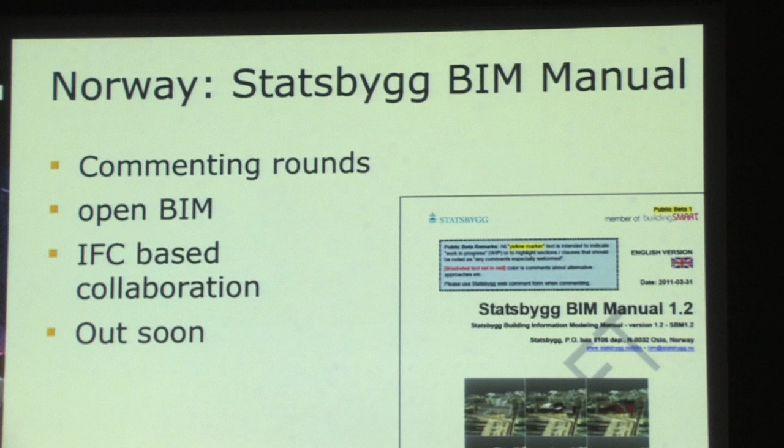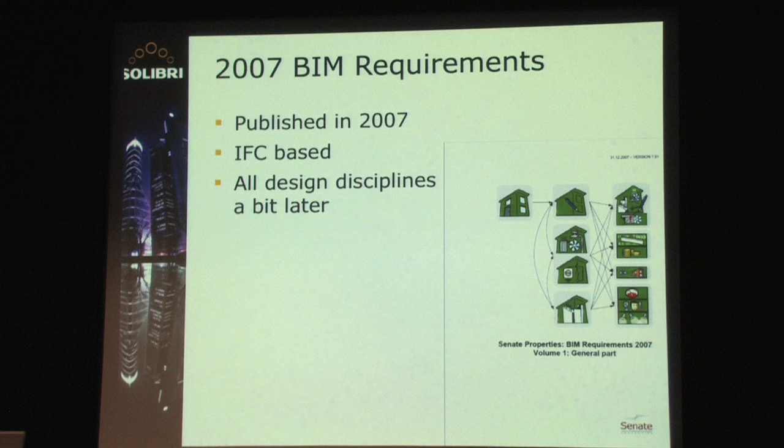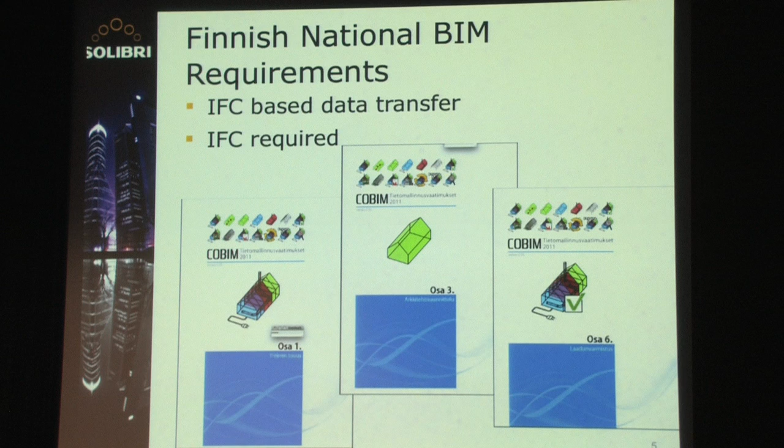If we start with the current situation in Nordic countries, Statsbygg in Norway will have their BIM manual out quite soon, and what they speak about is OpenBIM, but they really mean IFC. In Finland, we have had BIM requirements published by Senaatti Properties, which is the government-level facility manager. I think what is most interesting in Finland is that Senaatti Properties had the idea that they would upgrade their BIM requirements and guidelines. In practice, this means that in Finland we will have, as the first country on earth, national BIM requirements.

So from the architect's point of view, there will be something that is most beneficial. There will be what we call a buyer's guide. Building owners and construction companies, they will have instruction on how to buy BIM services.

In other geographical areas, UK is sort of getting started. Her Majesty's government are preparing a BIM strategy. In the US, the federal level GSA, they have had BIM guidelines for about 10 years. In Korea, we have lots of guidelines and requirements. And it's really good to see that Sweden is sort of coming a bit behind. We heard about Locum, Skanska is very deep into BIM, and I know that Peab and many engineering and architecture companies are also.

So I think this is a good development, and I was especially happy to see Link tell about how they feel about BIM and how they sort of approach this problem. It's not about software, it's about the process, it's about the competencies. And in this way, I think the approach was very mature for an architect office.

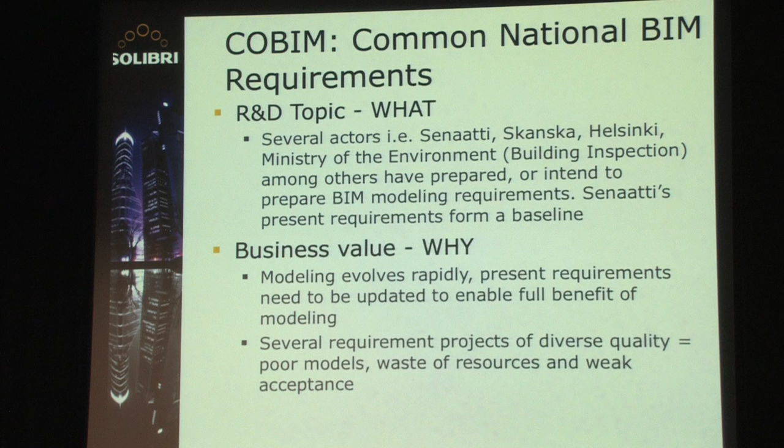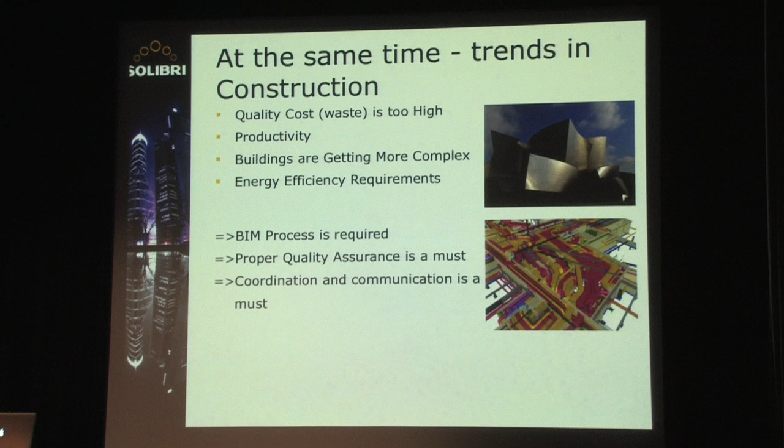So the COBIM is basically a continuation to what Senaatti Properties has done. And the real business value is that when we have one set of guidelines and requirements, everyone in Finland will know what to do. Link showed that the BIM process is required, and they also said, I think Lars said something, that you have to get things really right. Yeah, and that's about the quality. And of course, the coordination and communication is most important.

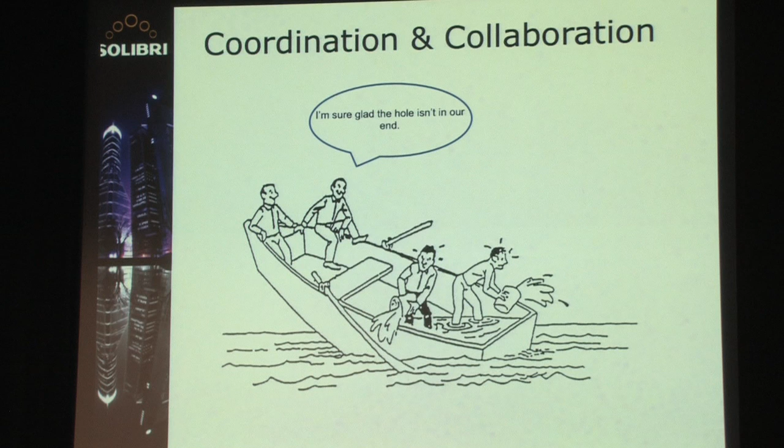So the old way, it doesn't work. We have to get rid of this. And this is, of course, one of the things we try to avoid when we use BIM and quality control.

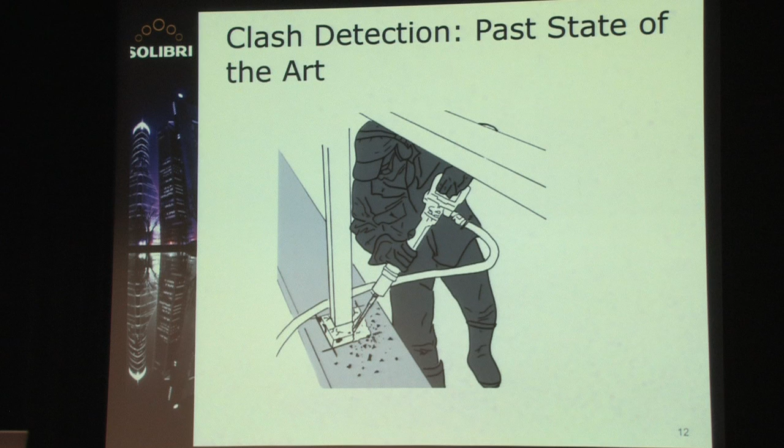Of course, there are much more other benefits than we can see in this picture. We have better design, we have better facilities for the end users, we have something that will probably be more friendly from the environmental point of view. So basically, BIM will be able to help in most of these things.

The traditional way in complex things has been that we make a prototype. And if we sort of think about manufacturing industry, they would make prototype after prototype, and then they would get the production process right. And this is something we haven't been able to do in the construction industry. So things are getting better.

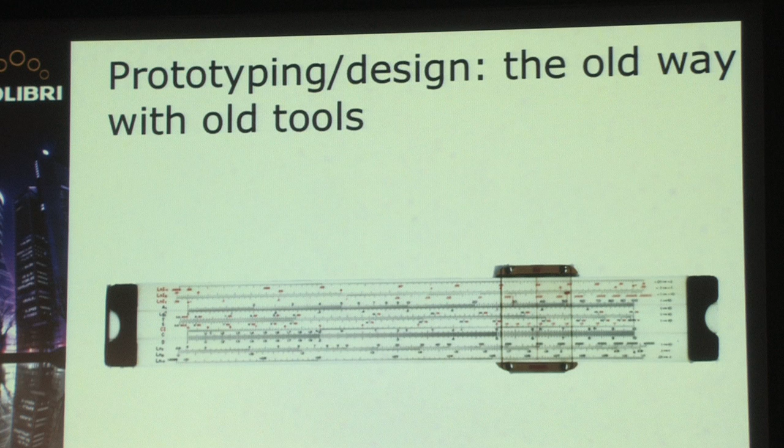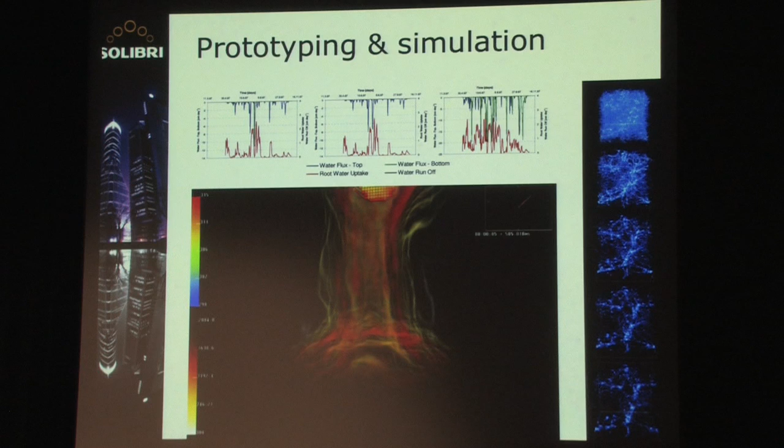This is what we used to have in the 1970s, even 80s, when we did, for example, structural design. But today, with the use of computers, we can basically sort of get at real-life prototypes. But this will have tremendous effects on the quality of design and, for example, construction costs, environmental issues, and so on.

One word about Solibri Model Checker. I always want to lift up one thing, and that's today, it's the rule sets in Solibri Model Checker.

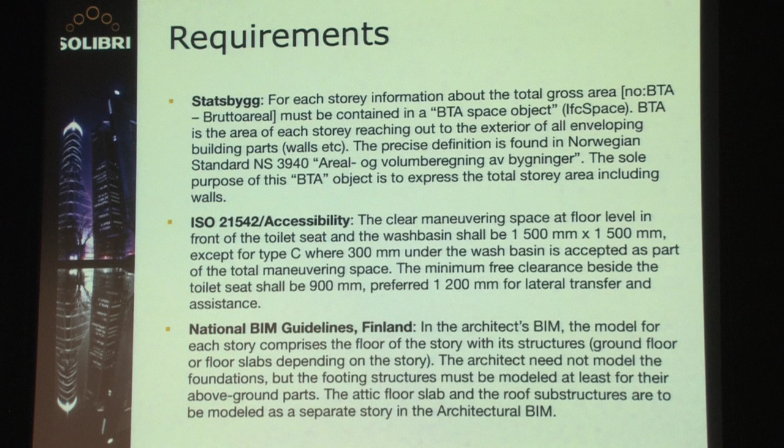Someone will have requirements. Locum will have a BIM manual, Statsbygg will have a BIM manual, we will have accessibility requirements. They are quite complicated. Okay, but then at the bottom, if we go to the bottom of things, BIM requirements are usually very simple and easily understood.

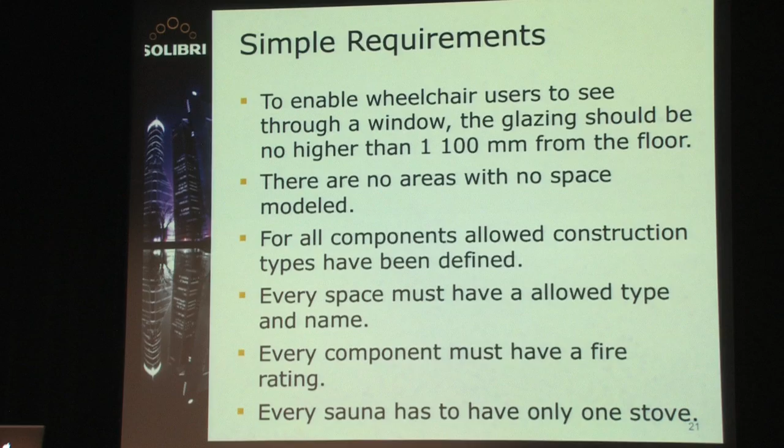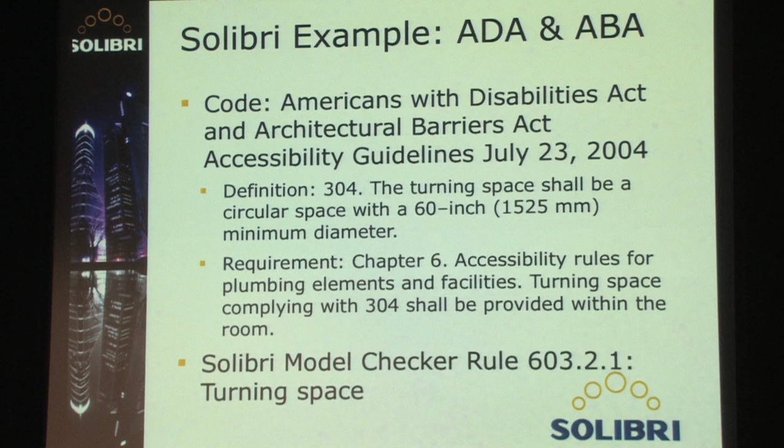And this is where actually Solibri Model Checker comes in. It's about analyzing BIM files. For example, in the United States, there is a building code, Americans with Disabilities Act, and they have this definition that in an accessible space, you should have a 60-inch turning space. And in Solibri Model Checker, we have this rule, 603.2.1, called turning space. So someone has a requirement, and Solibri has a rule.

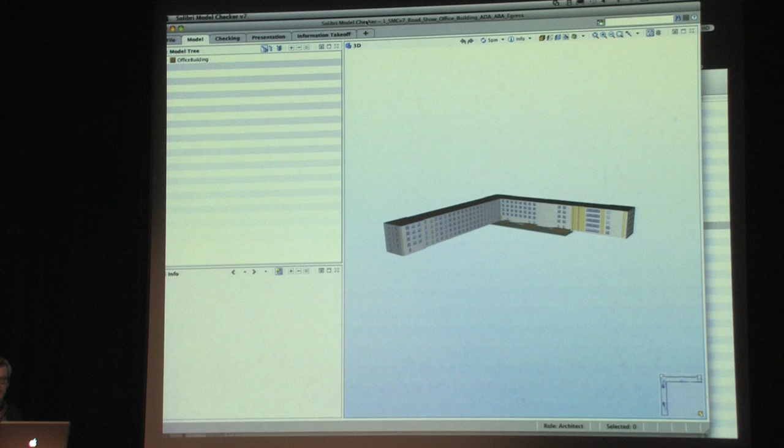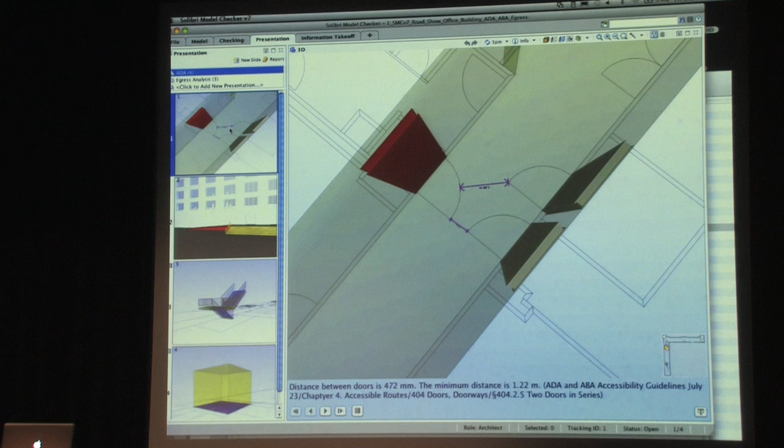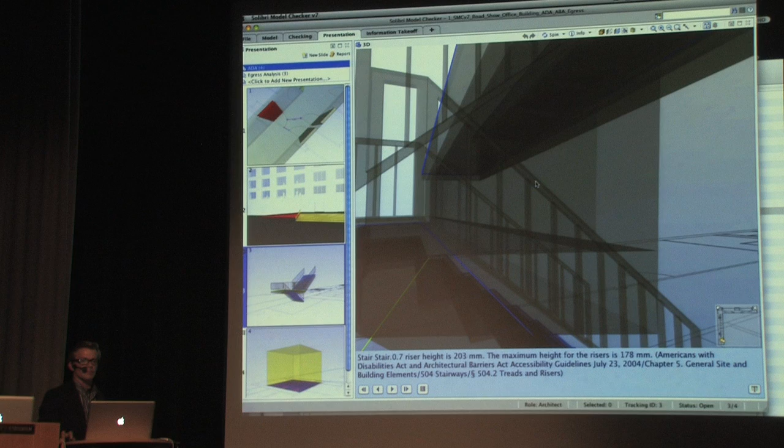So in practice, what this means. Okay, this is a building. It's very boring, probably a federal building by the federal government from the United States. And here we have done some analysis of the model. For example, accessibility. Solibri Model Checker has detected that if we have the doors open, this corridor does not fulfill the requirements. Or this ramp outside the building, it's too steep and it's too long. And the risers in this stair, they are too high.

And in practice, what Solibri does, the checking. We have one rule, and we run the check. Okay, now you can see the progress bars, and very soon it's done. And the results are visible here.

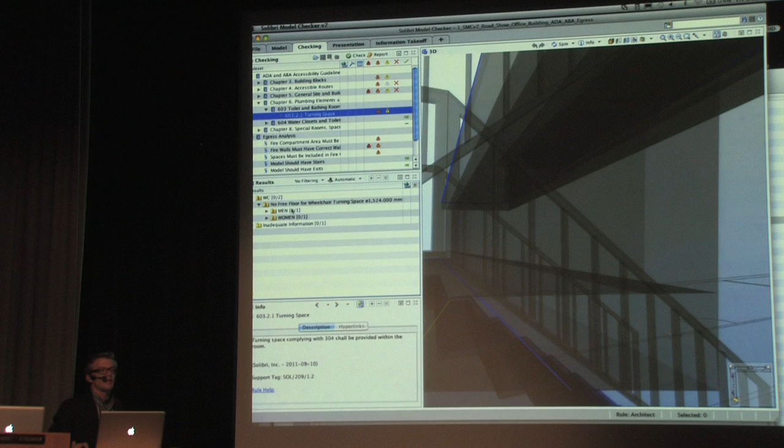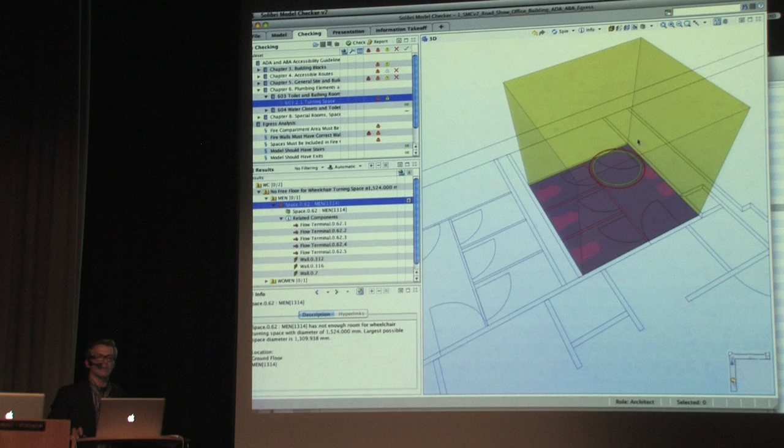And Solibri Model Checker has detected that we have this space. Okay, and let's hide the space component, and let's take the space and the related components together. So basically, we have space, we have what we have here, we have turning space. Solibri has detected that there is space only for the green turning space, while the red is required. And if we add this other component, it's quite clear what is the problem.

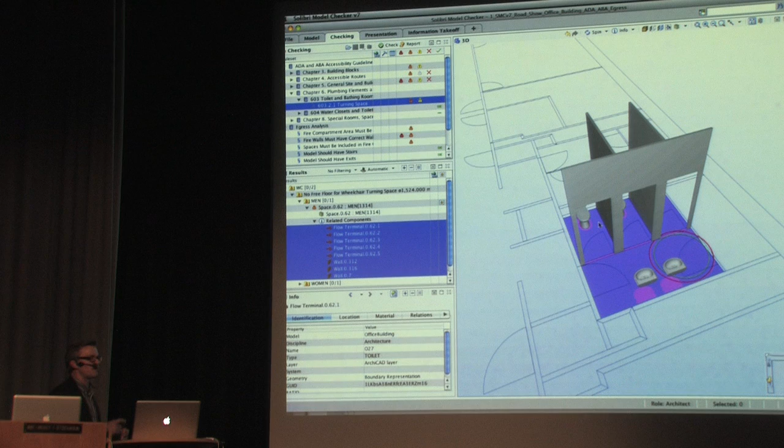So BIM analysis and Solibri Model Checker is about fulfilling requirements and finding these things before they are built. And this will make production and construction more productive, and we will have better facilities for the users. Okay, thank you.